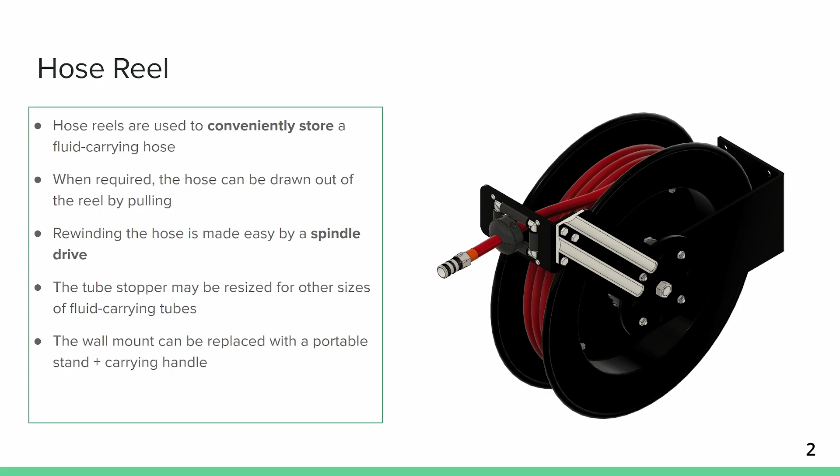The hose reel can also be made portable by replacing the wall mount with a portable stand and carrying handle. This is the exploded view of the hose reel. The reel can be separated into three main parts: the frame, the spring drive system, and the reel. We are treating the spring drive system as a black box as we will not be modifying it.

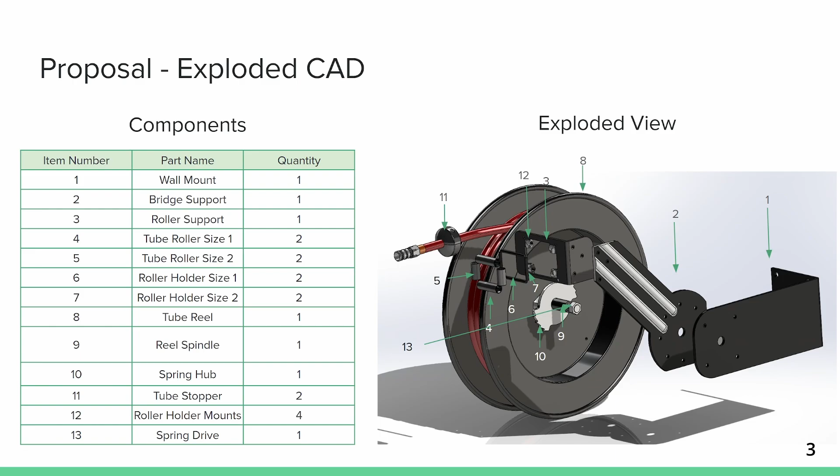Our primary customer base are any form of automotive shops. Air tools are the most common form of tools mechanics use when dealing with fasteners to replace components. Another very important air tool is used to check and change tire pressure, which is extremely important for safety. Thus, that makes the hose reel a very convenient choice for them.

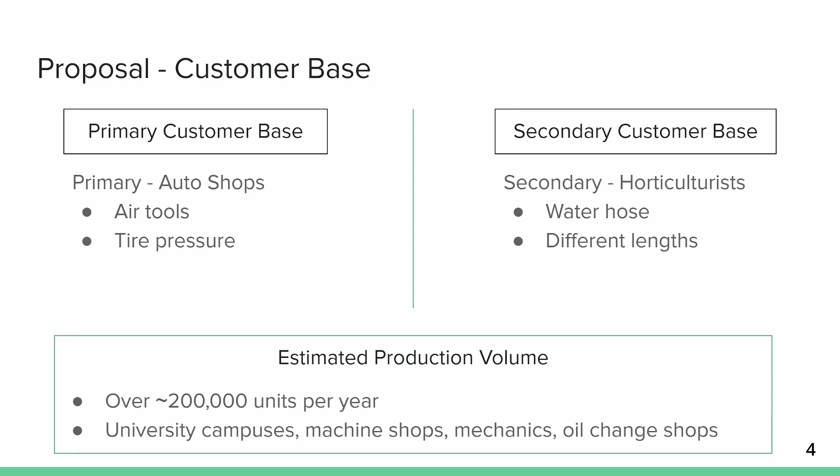Our secondary customer base are horticulturalists, which are professional gardeners, and since the majority of elders choose to pick up gardening, having our redesigned, easily maneuverable hose reel will make gardening significantly easier. Estimating our production volume to be over 200,000 units per year, we can see how that is easily achieved over many university campuses, machine shops, mechanics, oil change shops.

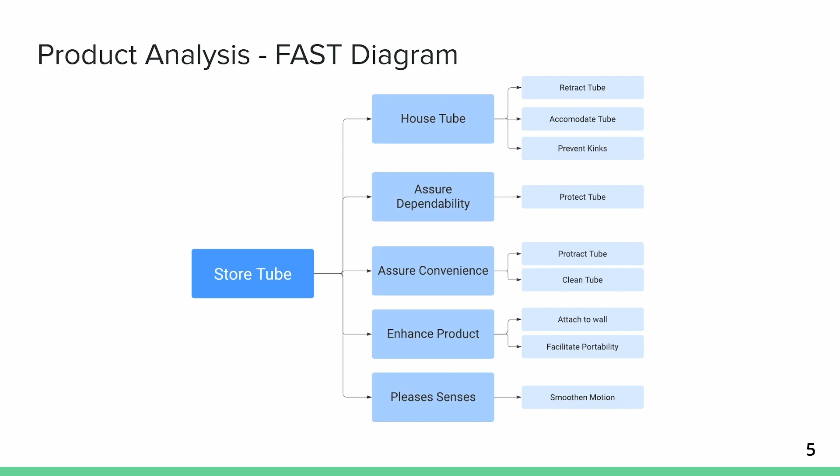Our main function in our FAST diagram would be to store the tube, and this is divided into subfunctions related to housing that tube and other functions that the hose reel should contain, including retracting the tube and protecting the tube. This is our bill of materials.

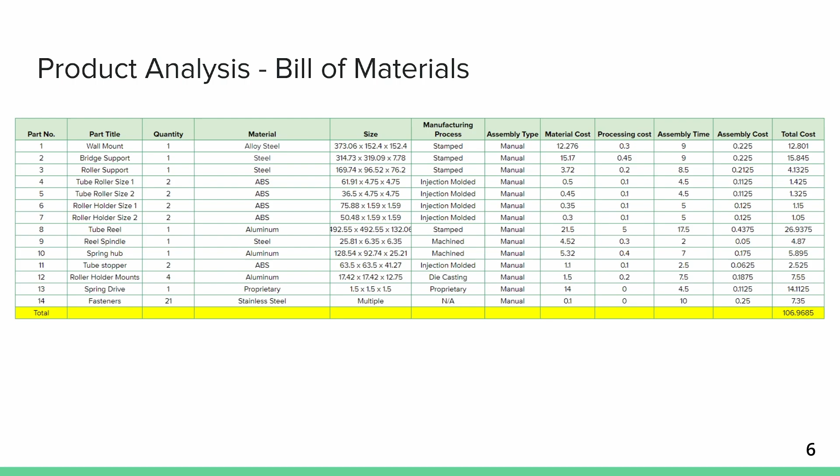To estimate material cost, we use the volume and density of each part. To determine material costs specifically, we use the metal chart for stamped and machined parts and the bulk material cost for our ABS and cast parts. To estimate our assembly cost, we assume manual labor, putting it at $90 an hour. To estimate our processing cost, we assumed an annual production rate of 200,000 units per year. Our spring drive system, we assume, is pre-purchased. This total cost led up to be $106.97.

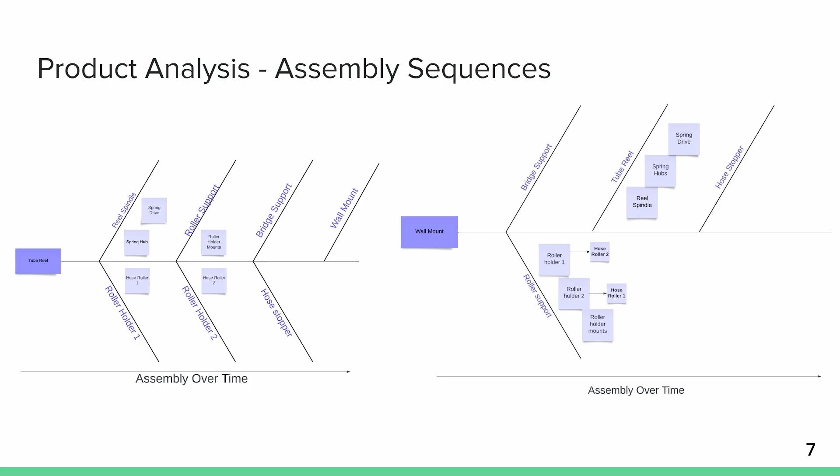The tube reel then can be assembled in conjunction with other rotating components, leaving just the hose stopper at the end. After looking at the two assembly diagrams, it has been displayed that having multiple sub-assemblies under one assembly, like the roller and spindle components, increases the ease of assembly. This makes the assembly much simpler and therefore shows that the wall mount assembly has a higher ease rating.

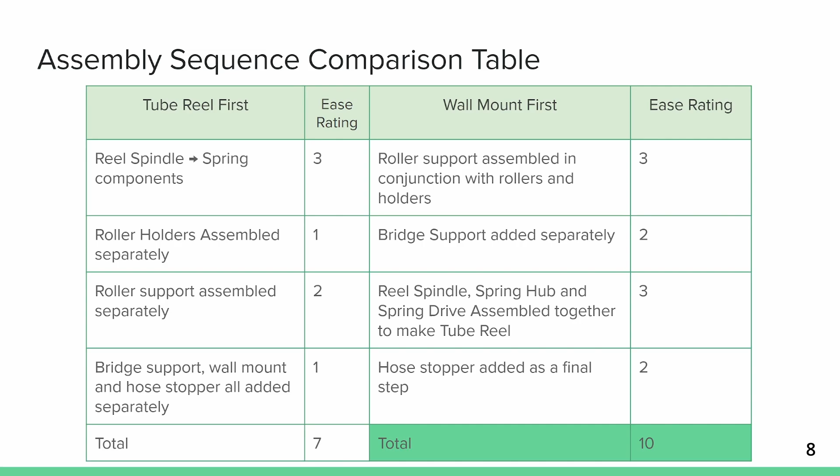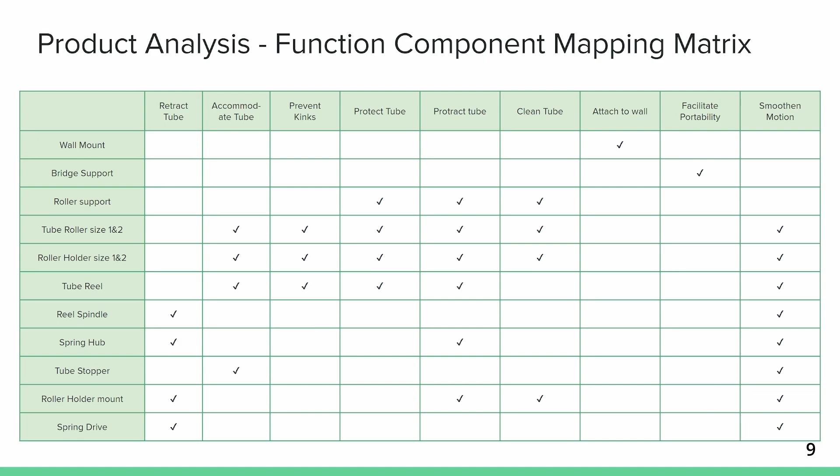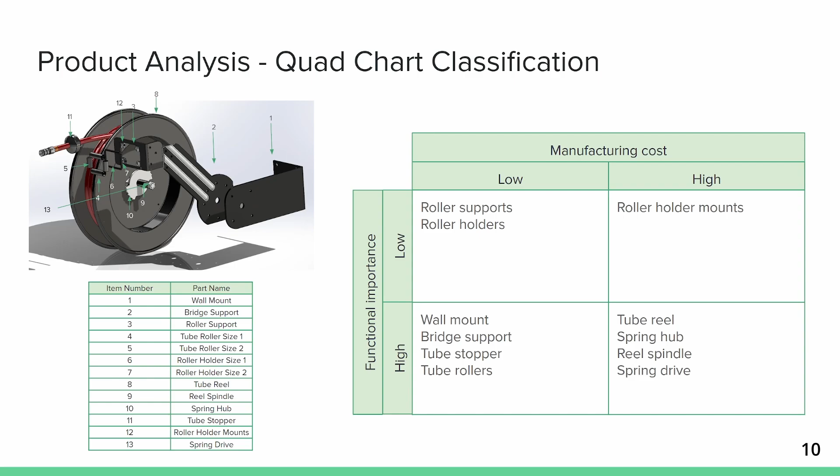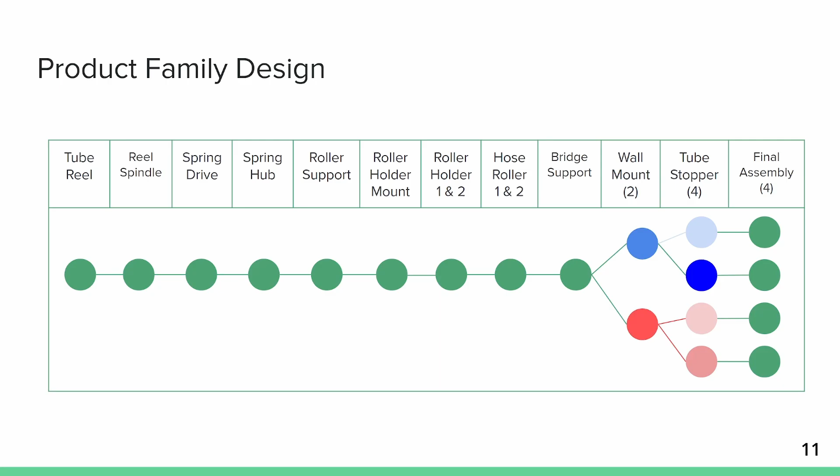Our product family design can be divided as follows. Most of the components are similar, however, there are different wall mounts for different purposes. Horticulturists would prefer a garden hose, so a mount would be portable, and an auto shop would prefer a mount in an auto shop for an air hose. For these individual hoses, there would be different tube stoppers as well as different wall mounts.

The primary design that we're looking at here is the original CAD design that we started with. Our secondary design has had the wall mount replaced with an easy carry handle and legs that allow the hose to travel freely. Secondly, the tube stopper has gotten larger to accommodate the larger water hose.

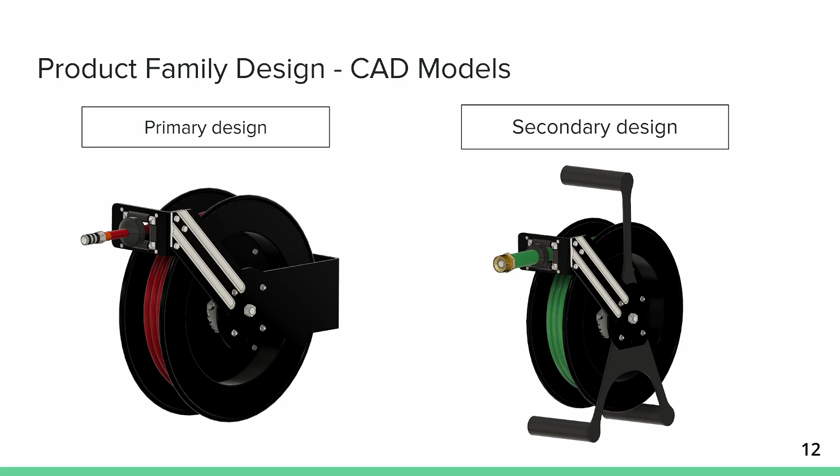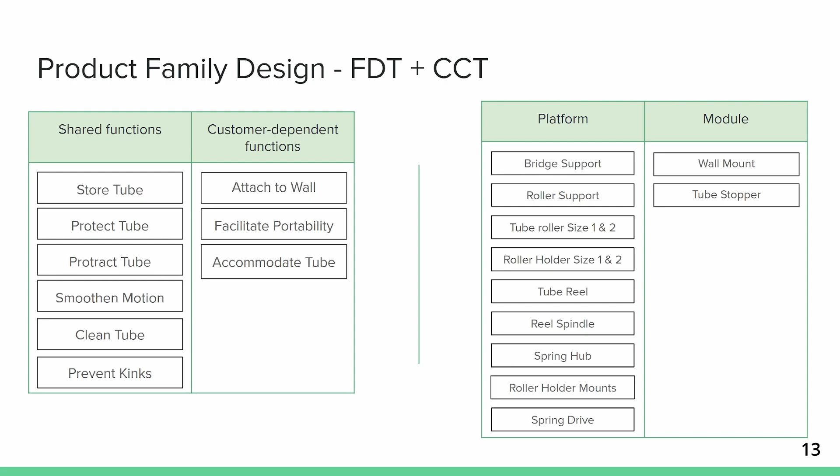With respect to the FDT diagram, the functions that are not shared across our customer layout are the following: attach to wall, facilitate portability, accommodate tube. We achieve this by changing the wall mount to an easy carry handle to facilitate portability and changing the tube stopper size to accommodate the tube's girth change. And with that, that wraps up our presentation.